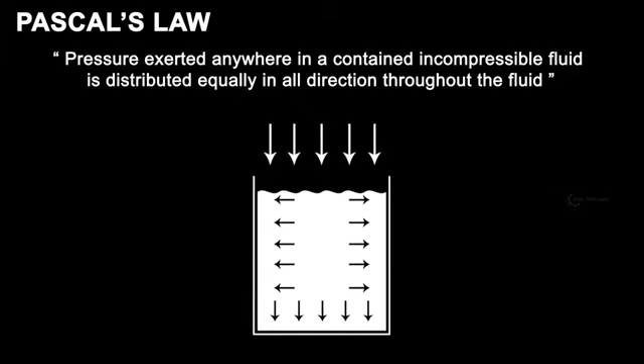Let's see the principle behind the disc brake system. The brake system works based on Pascal's law. The law states that pressure exerted anywhere in a contained incompressible fluid is distributed equally in all directions throughout the fluid. Let's make it simple.

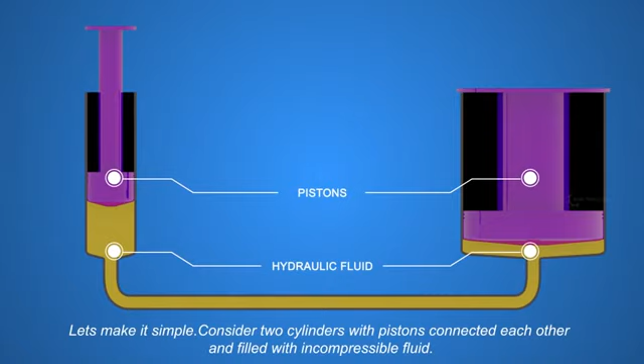Consider two cylinders with pistons, connected to each other, and filled with incompressible fluid. The mathematical relation is as follows: F1 is the applied force on the left piston, F2 is the received force at the right piston, A1 and A2 are the surface areas of both pistons, and P1 and P2 are the pressures experienced by both pistons.

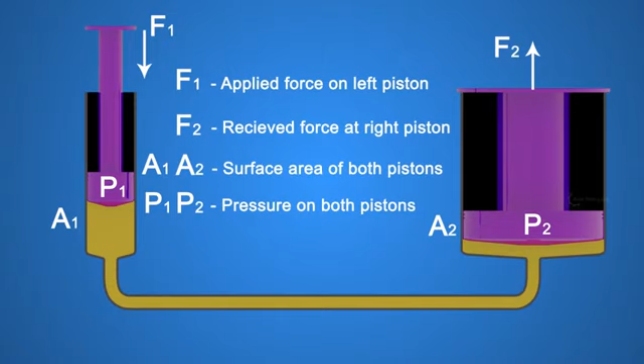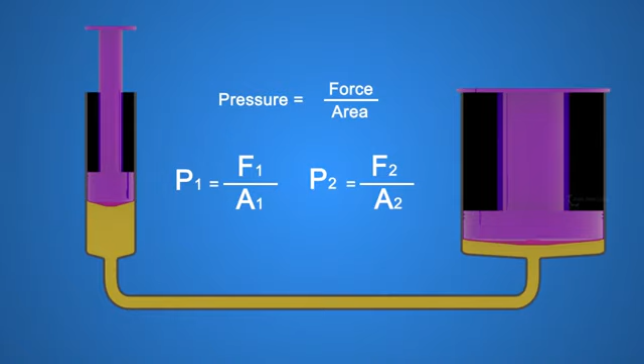Pressure can be stated as force experienced per area. So P1 equals F1 by A1, and P2 equals F2 by A2. According to Pascal's law, pressure on both pistons are equal, which gives us P1 equals P2.

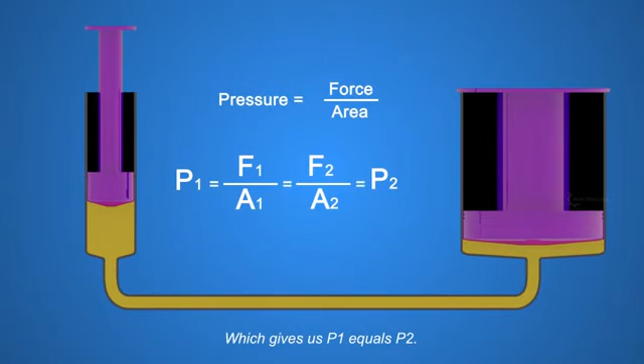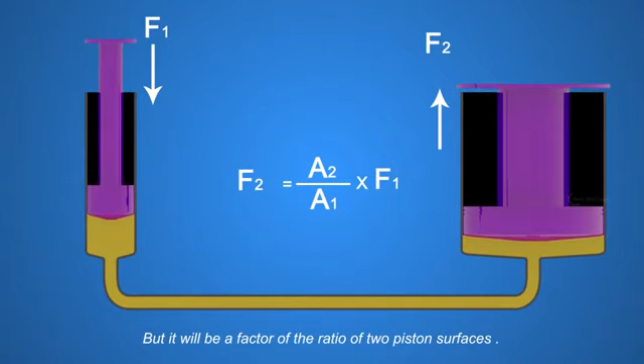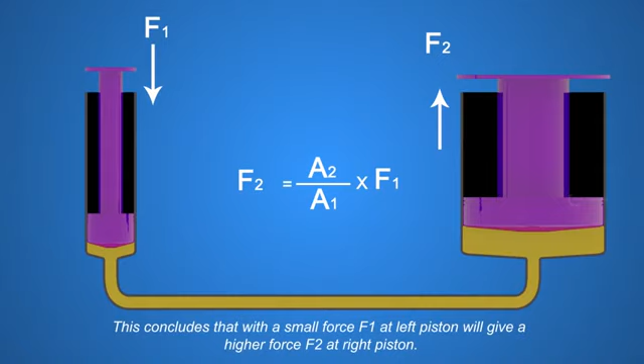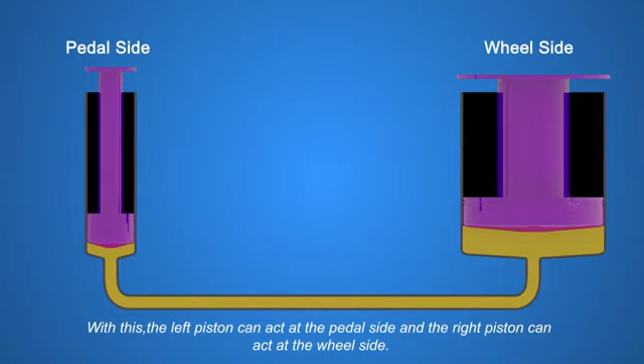So when force is applied to the left piston, the fluid will transmit the force to the right piston surface. But it will be a factor of the ratio of the two piston surfaces. This concludes that with a small force F1 at the left piston, we get a higher force F2 at the right piston, provided A2 is greater than A1. With this, the left piston can act at the pedal side, and the right piston can act at the wheel side, transferring energy from the pedal to the brakes.

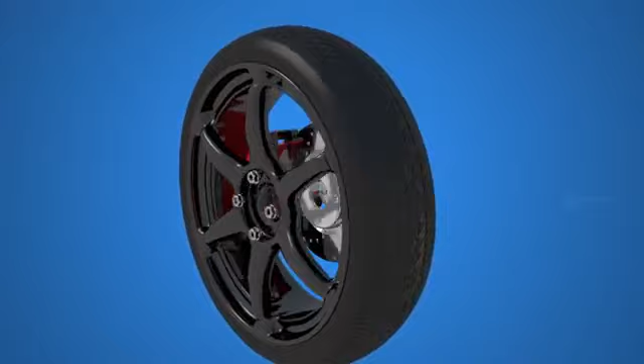Now we know the theory, let's see how this works in real life. Let's see the exploded view of a car wheel and the parts involved: the wheel hub assembly, the disc brake rotor, the brake caliper assembly, the wheel, and the lug nuts.

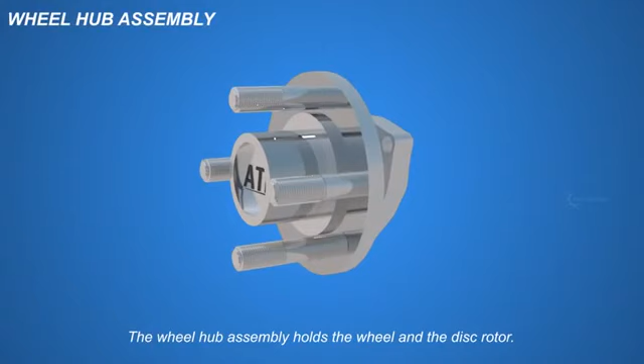The wheel hub assembly holds the wheel and the disc rotor, and the bearing inside it allows their smooth rotation.

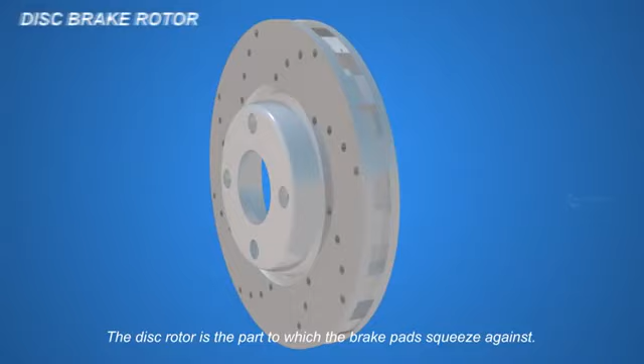The disc rotor is the part to which the brake pads squeeze against. This creates friction that retards the rotation of the wheel. The disc rotor produces a lot of heat due to this friction, and the drilled holes provide ventilation to remove this heat.

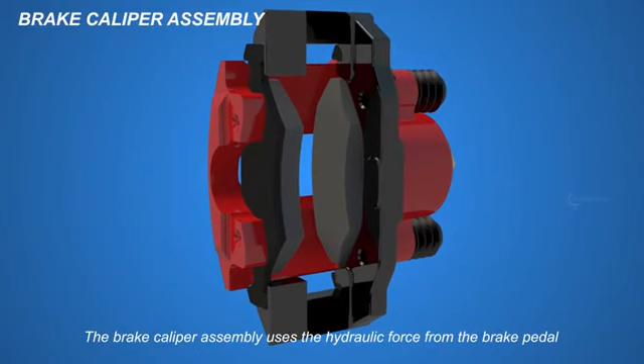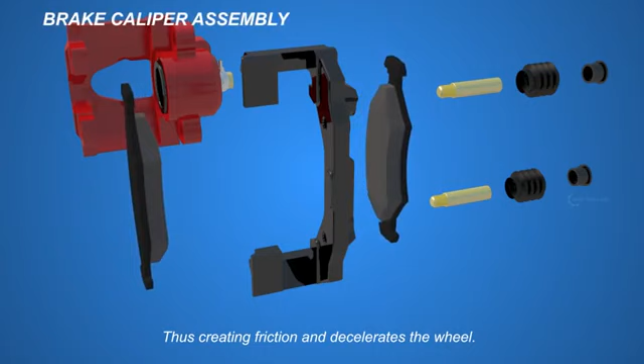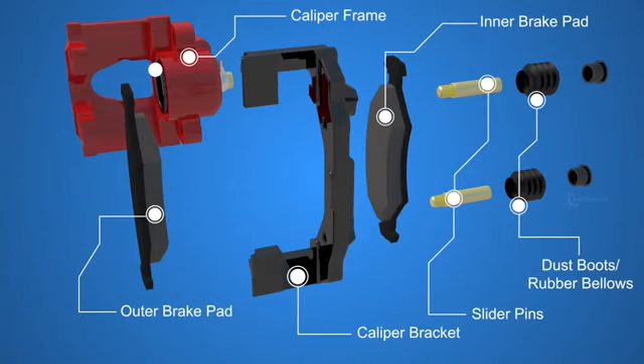The brake caliper assembly uses the hydraulic force from the brake pedal to squeeze the brake pads to the rotor surfaces, thus creating friction and decelerating the wheel. The caliper assembly consists of the caliper bracket, slider pins, dust boots, inner brake pad, outer brake pad, caliper frame, and inside it, the piston.

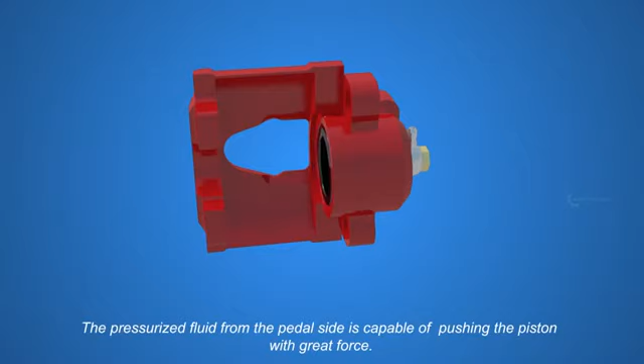The caliper frame has a banjo fitting, through which the fluid reaches the piston. The pressurized fluid from the pedal side is capable of pushing the piston with great force. Also, the caliper frame is free to slide along the slider pins within a fixed extent.

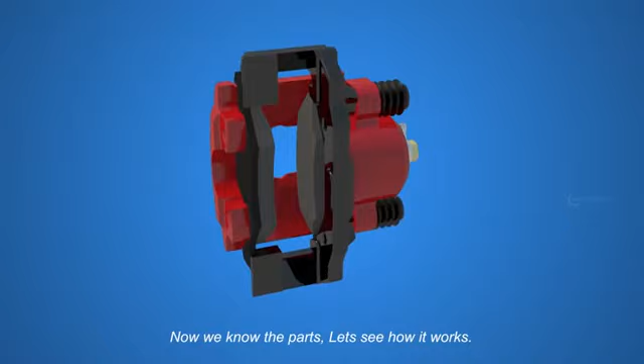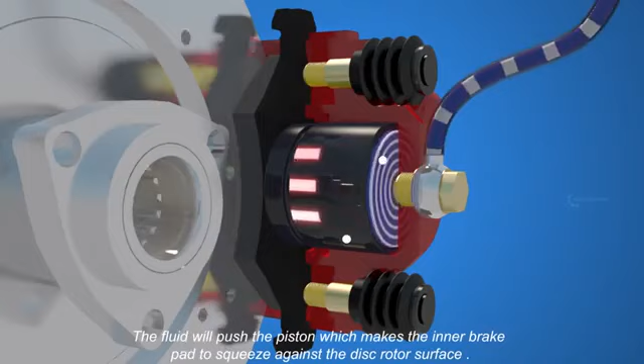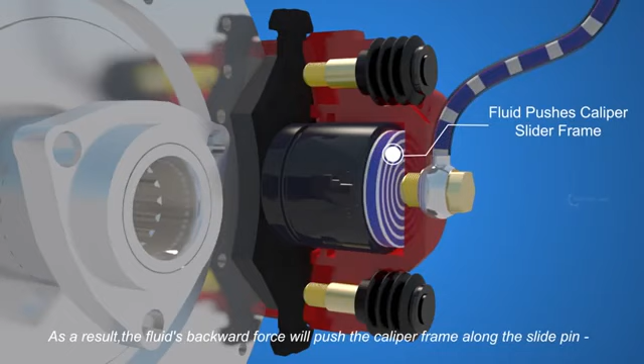Now we know the parts, let's see how it works. When you apply the brake, the caliper receives high-pressure hydraulic fluid from the brake master cylinder. The fluid pushes the piston, which makes the inner brake pad squeeze against the disc rotor surface. As a result, the fluid's backward force pushes the caliper frame along the slide pin, which makes the outer brake pad squeeze against the other side of the disc rotor.

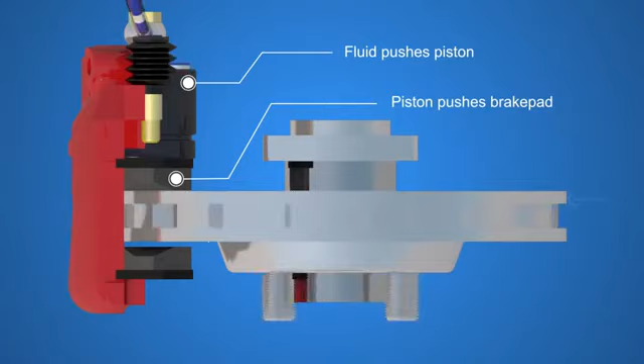Let's see one more time from the top view. The fluid pushes the piston, and the piston pushes the inner brake pad. Once the inner brake pad is pushed against the rotor, the fluid pushes the caliper frame, and the outer brake pad is pulled towards the other side of the disc rotor.

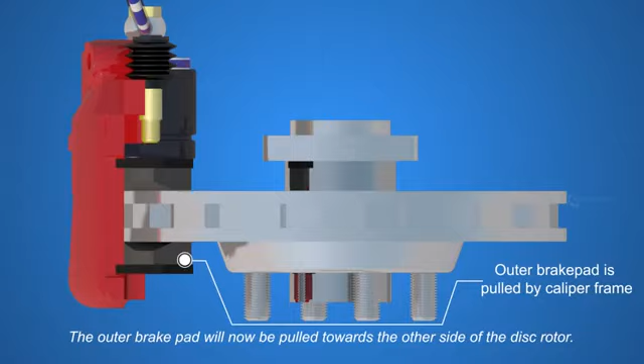This is how the disc brake system works on the wheel side. In the next part, we will see what a master cylinder is, and how it transfers fluid to the caliper.